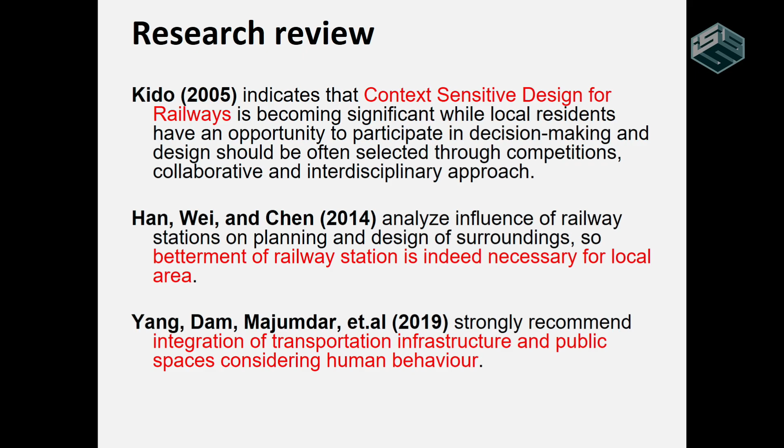This is the research review. I put here three researches. One of them is Professor Kido, who indicated context-sensitive design for railways. He said that it is very important, especially for local residents, to have an opportunity to participate in the decision making and design. So it is a kind of trend also in Japan.

Han, Wei, and Chen analyzed the influence of railway stations on planning and design of surroundings, so betterment of railway stations is indeed necessary for local areas. And Yang Dam et al. strongly recommended integration of transportation infrastructure and public spaces considering human behaviors.

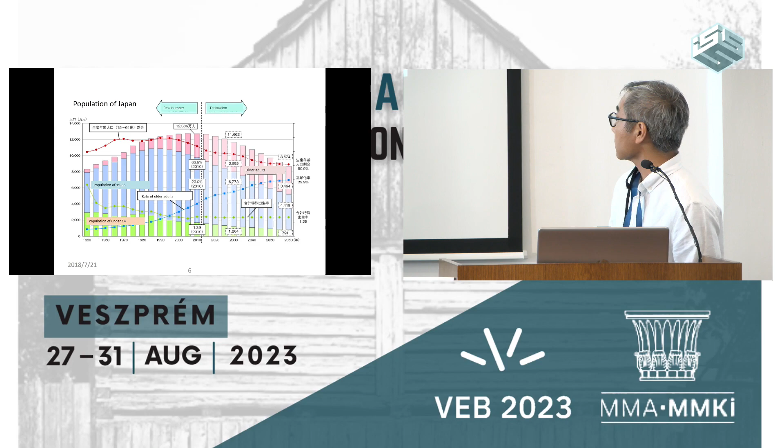Do you know this number? It is the percentage that shows us the disappearing towns in Japan. Japan is now facing depopulation over these past 20 years or so. This is the current trend: aging and a reducing young generation is rapidly going on. So the shrinking population is also one of the big problems, especially in local areas.

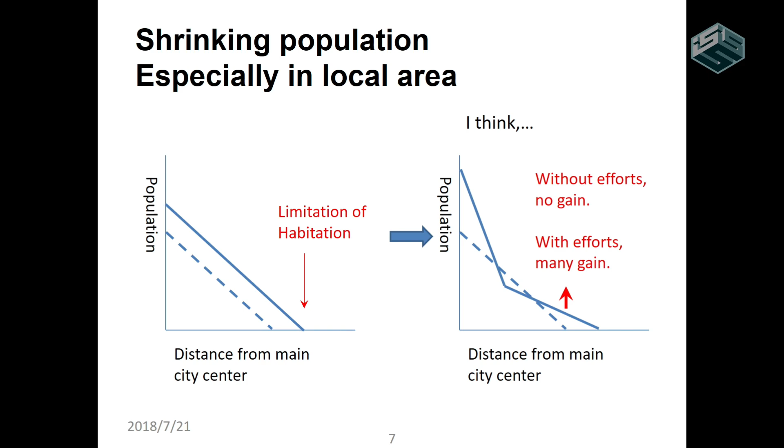I think it is also important to enhance the local area's activation. This figure shows you, on the left side, one example where a Japanese economist said to increase... the x-axis shows distance from the main city center, and the y-axis shows the population. He said that increasing economic effort, especially in the center of the mega city, is very important, not only for the local areas. But I think that without efforts in the local area, especially facing depopulation, it is not good for the future of the local area as well.

So therefore I'm doing this kind of activities and practices, especially for my study area. This is the Hizenhama Station, Kashima-City, Saga Prefecture. It is located in the southern part of Japan. My prefecture is Saga Prefecture, part of Kyushu Island, located in the most southern part of Japan.

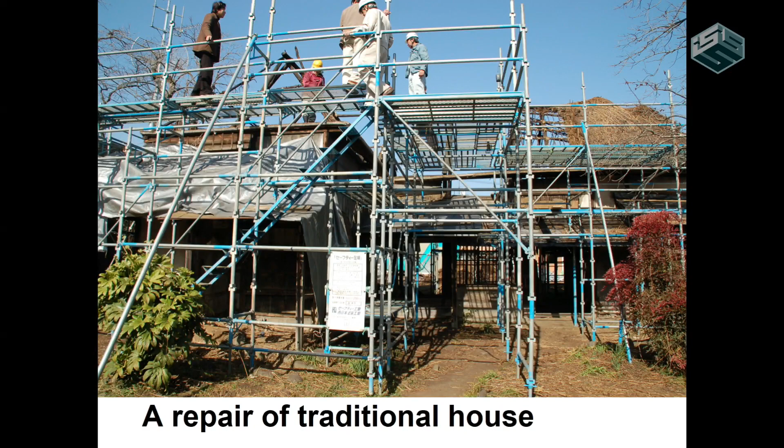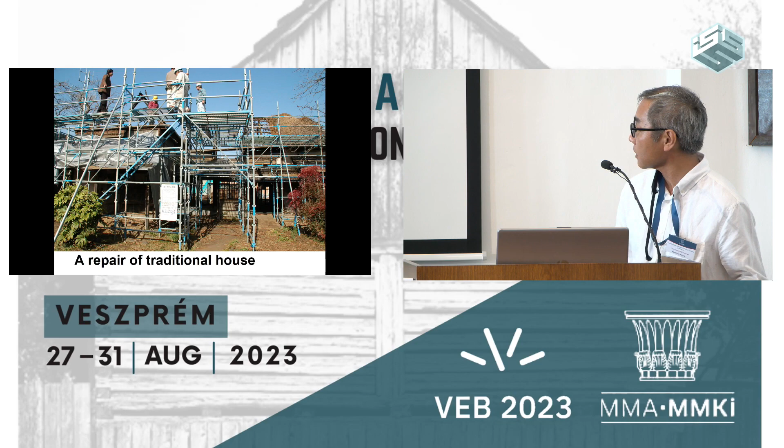So then we started also the repairing of traditional houses. This is before the preservation areas designation. The local carpenters also participated in these activities without money. Anyway, most of us participated in this building as volunteers.

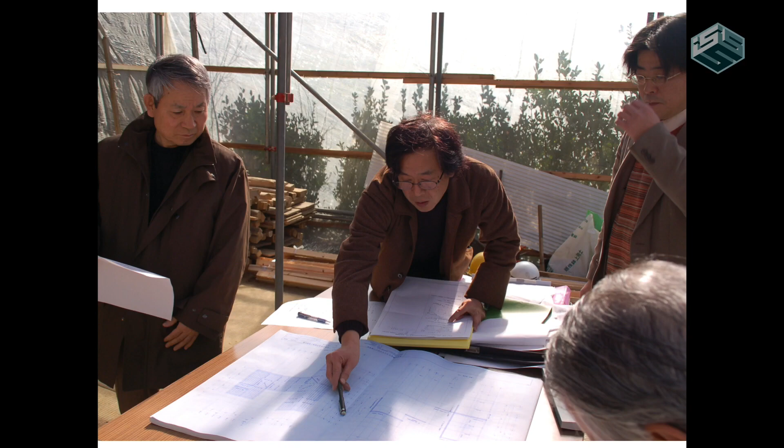Also, the local architects participated in this work. The carpenters of the thatch roof showed us how this building was made. And also the pupils in the elementary school participated in the wall making and so on.

Also, this area is very vulnerable to disasters, especially fire accidents. So we involved the firemen, and then we had fire drills. We also installed an easy-operated hydrant which can be carried by one person, placed in each 25 meters.

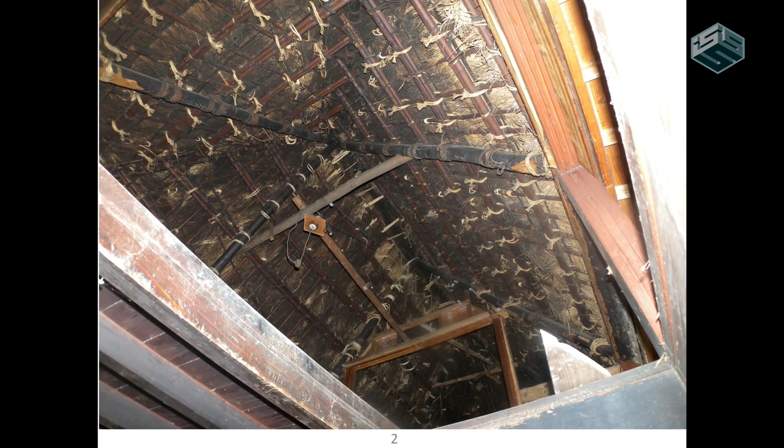So this is the inside of the thatch roofs. Also right now we cannot see this at all, because the thatch roof was covered from inside using plasterboard, so that we can't see it at all.

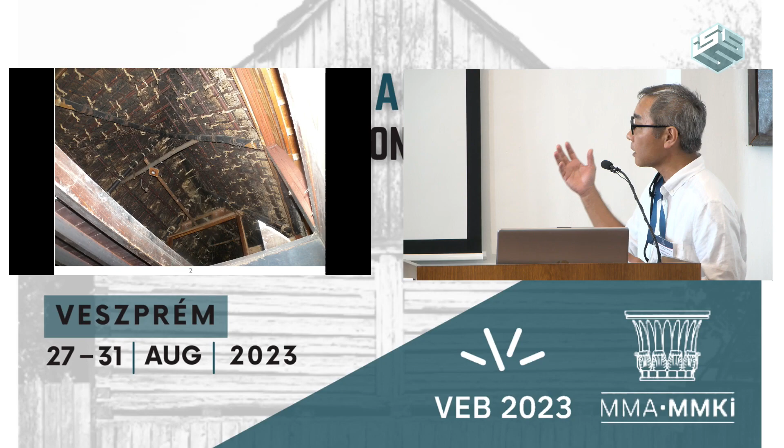But actually, when we have fire spreading, to protect the timber structure is more important rather than the thatch roof itself. But anyway, we also installed sprinklers to protect against fire spreading.

We created also squares in every area to install underground water pools to provide the water supply.

In May, we also have a sketch event. And in summertime, we have night markets. And in November, we have a music concert at the sake factories. I invited one pianist, whose name is Takeshi Kakehashi, a blind pianist who studied in Vienna.

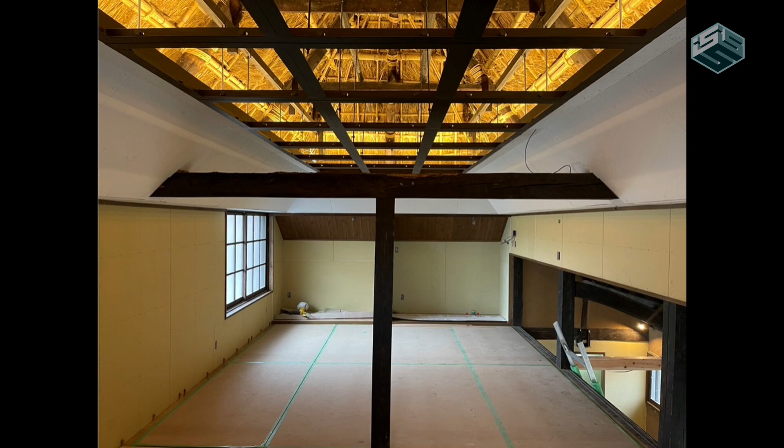So this is currently under construction. This is the inside.

And now I would like to move to the Hizenhama Station. This is after renovation, and this is from the Showa 20s, almost 1945.

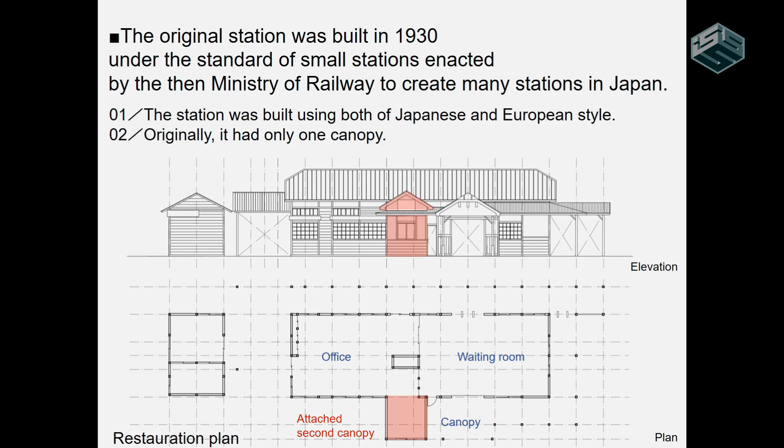Actually, the original design of the station was built in 1930, before the Second World War, under the standard of small stations enacted by the Ministry of Railway to create many stations in Japan. Without the standards, it would have been very difficult for the ministry to create so many stations. And that's why they made this kind of standard. This station used one of the standards, but it is slightly modified or changed from the original.

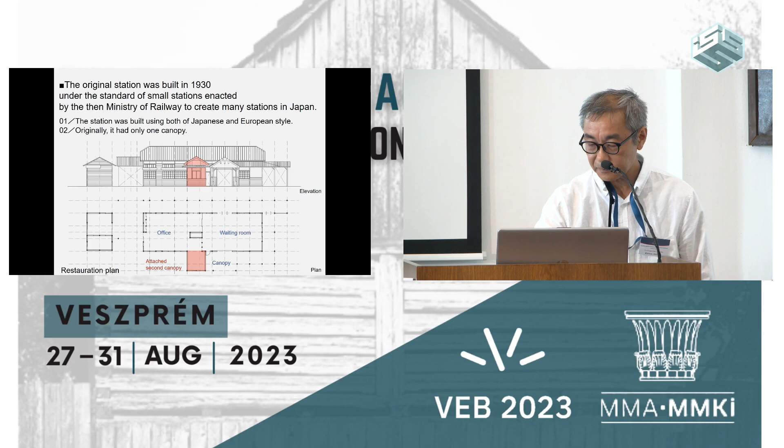So, for example, the toilet was attached to the waiting room, but that is not good for the waiting room because it's very smelly.

So we analyzed the station's situation, asking the local areas. They claim things like: dark waiting room, bad smelling toilet, no air conditioning. And then at the station squares, there's no boundary between pedestrian and car lanes. Although the tourist number is increasing, the pedestrian space is very narrow, and there's no boundary. So we have to consider how to deal with it.

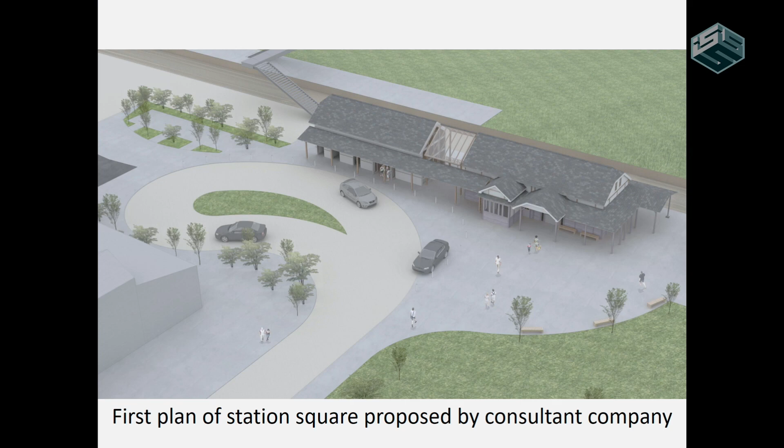This is the model of the building, but actually the station square is different from the current one. This was proposed by one of the companies which also participated in designing and planning, a consultant company.

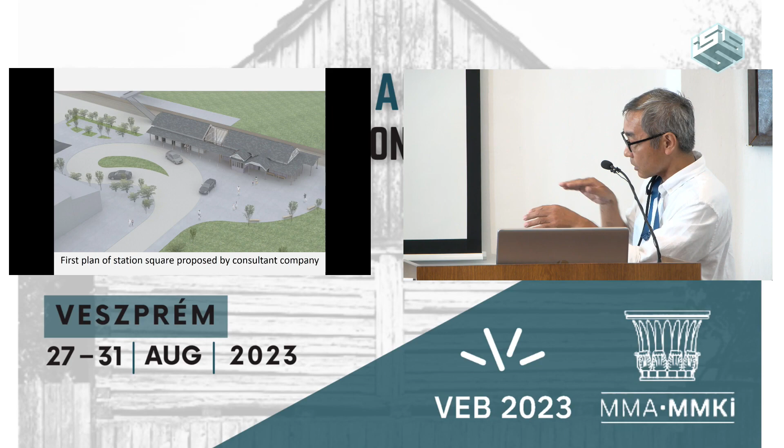They proposed this kind of round square, but I denied it because most of the local people use these stations by just driving to the station directly and going back. It's a more convenient style for the residents. So using this idea that people are already accustomed to is much better for the new design, I thought.

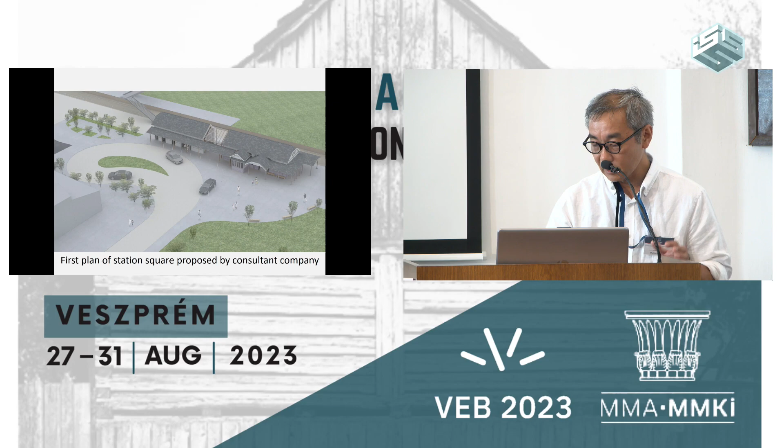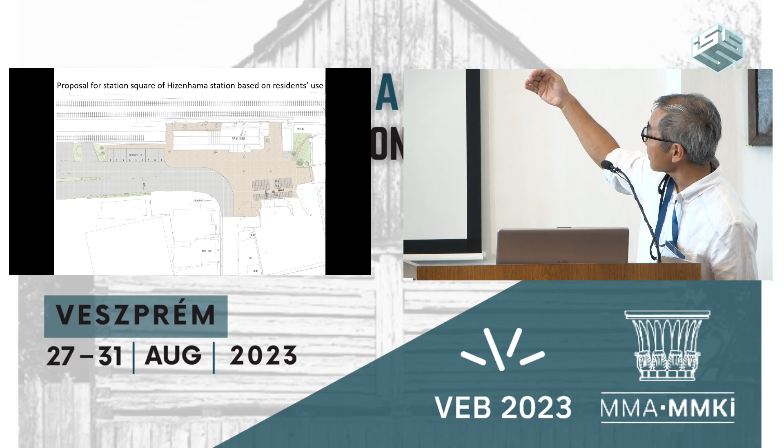Therefore, we decided to redesign it like this. In front of the station there is a small space where they can have events and also park. So although there are only about 9 parking lots, the residents can park their cars directly in front of the station as well.

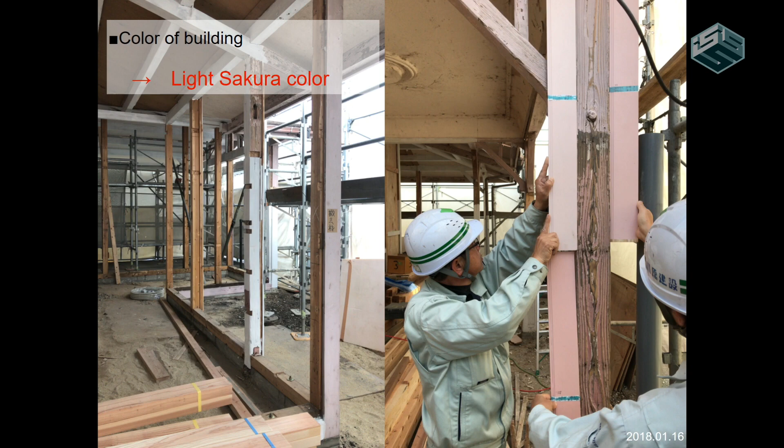We also checked the original color, and then we decided on the color. This is after the renewal, inside. And the left side, this is viewing from the railways.

So the left side is traditional buildings, and the right side is new parts. We put the cafe house and also the toilet on the right side.

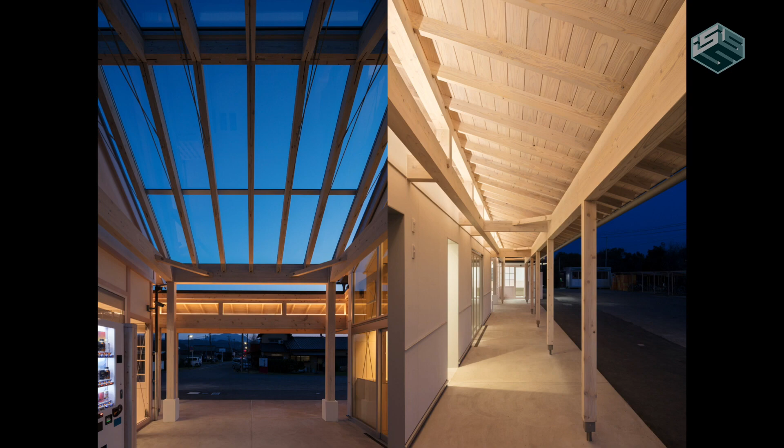The buildings should be detached because of the building code in Japan. To explain the details would take a long time, so I'll cut it short. If you have a question about why it should be detached, I will answer.